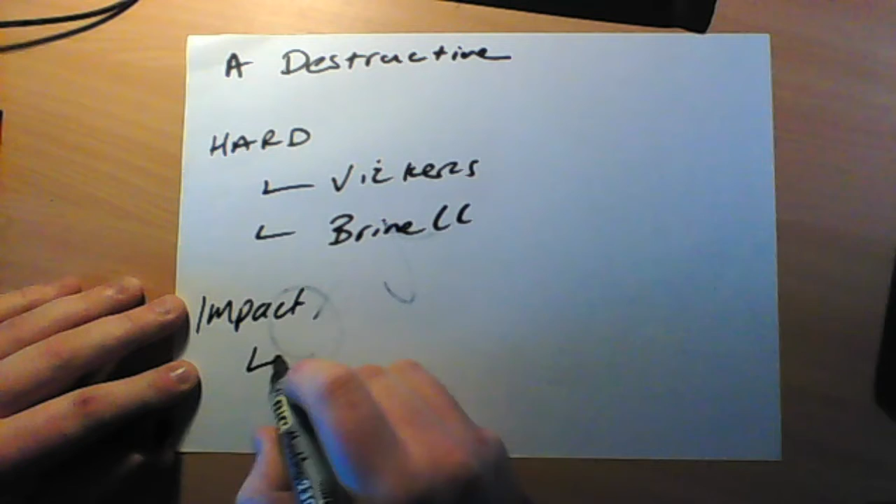So part A is always your destructive testing, okay? So you need to know your two hardness tests, Vickers, I'm going to go through these now in a second, and Brinell. And the other one you have is your impact, which is your Izod and your Charpy. So this is for part A.

Another thing you need to know is the different terms. So again, you have metal fatigue, and metal creep is one. That's where the metal stretches over time. And then you have metal fatigue, which is also over time, but it's to do with an on-off sort of stress.

So metal creep is where you have a soft material like lead or copper under huge continuous stress and it just stretches over time, whereas fatigue is where you have something strong like steel under stress that's on and off, and then eventually it cracks and shatters. Both of them happen over a long period of time. So those are a few key things you need to know. You also need to know advantages and disadvantages for both of these.

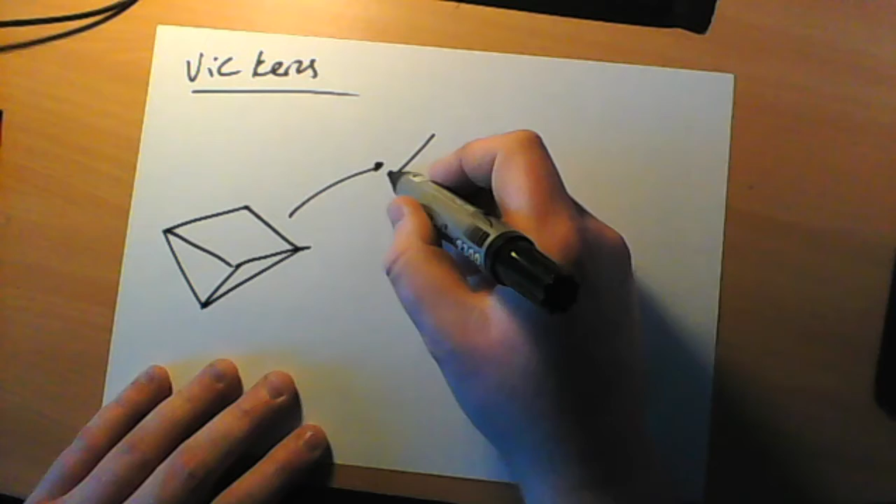Okay, so I'll start off with my Vickers. They could ask you to decide on a test to check the hardness of a material, Vickers or Brinell. So Vickers, like a V, the indenter looks like an upside down pyramid, like that. So you need to talk about what the indent leaves. When it goes into a piece, it leaves a square, like that.

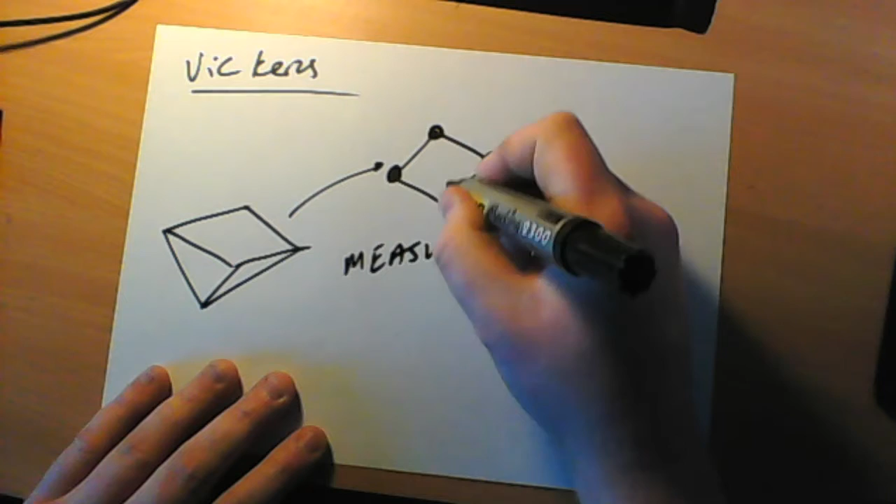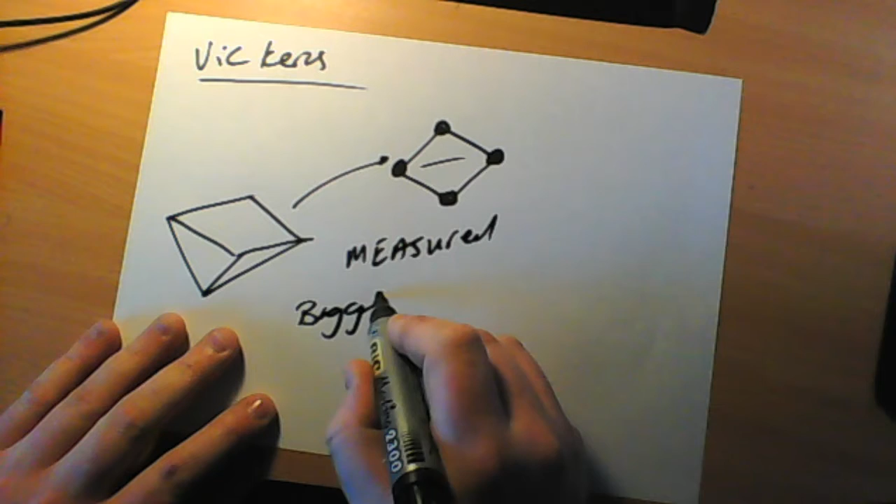How it's measured is you measure the diagonals. So you join the diagonals together and measure the distance, and the bigger this distance is, the softer it is. Same goes for Brinell. The bigger the circle is, the softer the material is.

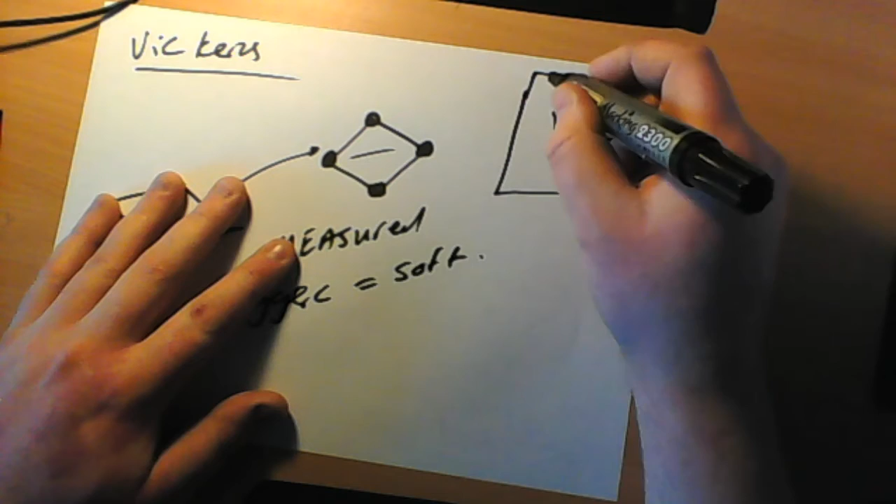Okay, so Vickers, those people that are pushing for A's could be drawing something like this. This is just the machine. Very, very rough, I'd be expecting better drawings than this. And then it looks something like that. That's your Vickers machine. The piece is put in there, this pushes into it, and that tests the hardness.

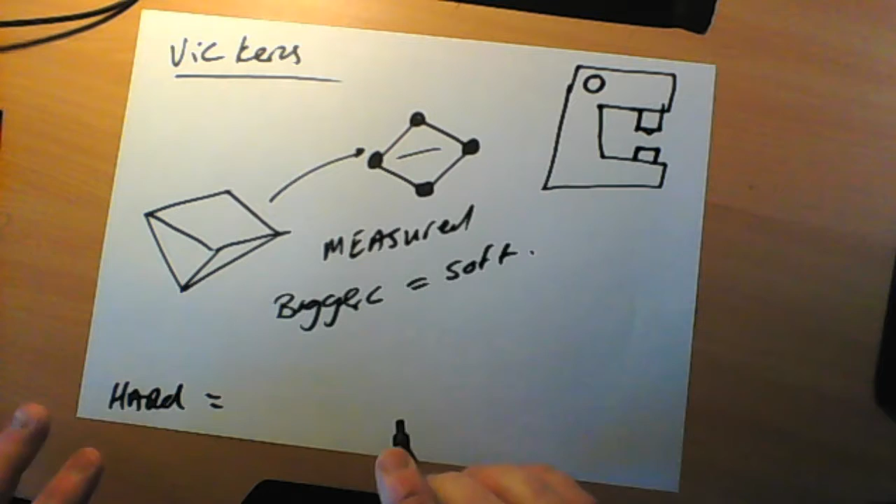So the hardness of a material is how it's able to withstand being dented or indented. So glass and even acrylic are hard materials, brass as well, quite hard materials. So Vickers is quite universal compared to Brinell.

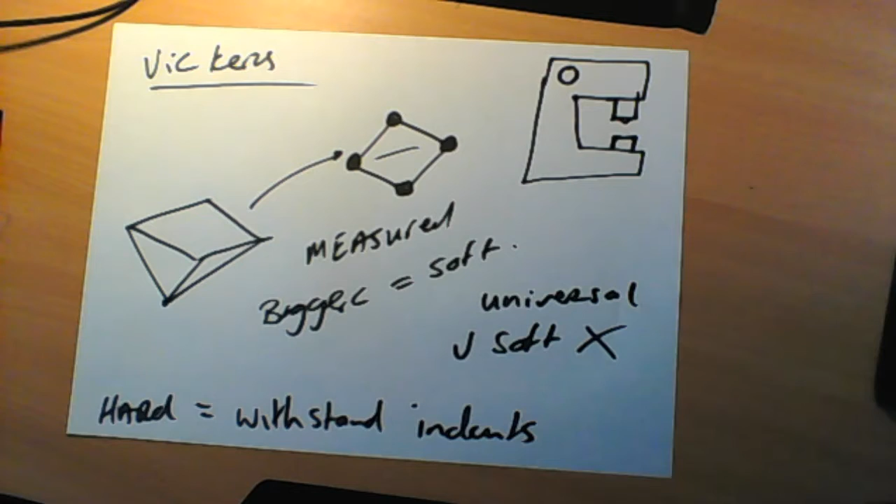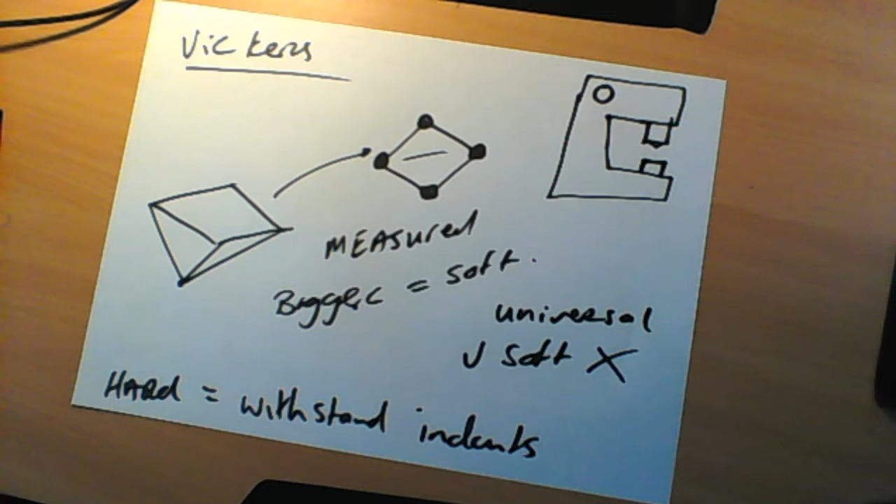Very soft materials are no good, because the indenter will just get lodged in it, because it's actually quite small, like the tip of a thumbtack, it'd be tiny. So if it's very, very soft, it'll go into it and get lodged in it. Is there anything else we need to mention for Vickers? Not really. So you just talk about the shape of it, how it's measured, advantages, disadvantages, and the hardness of the material, that it's able to withstand indents.

Okay, so go for Brinell, B for Brinell, B for ball. Brinell is just a sphere. The ball leaves an indent that looks like a circle, so I'm going to just draw a little circle on this to make it look like a sphere. What they do is you measure the diameter. Again, the bigger this is, the softer it is.

And the bad thing about it is if the metal is too hard, it can distort the ball into like an egg shape. So it can't do materials that are too thin or too soft, because the ball will get lodged in it.

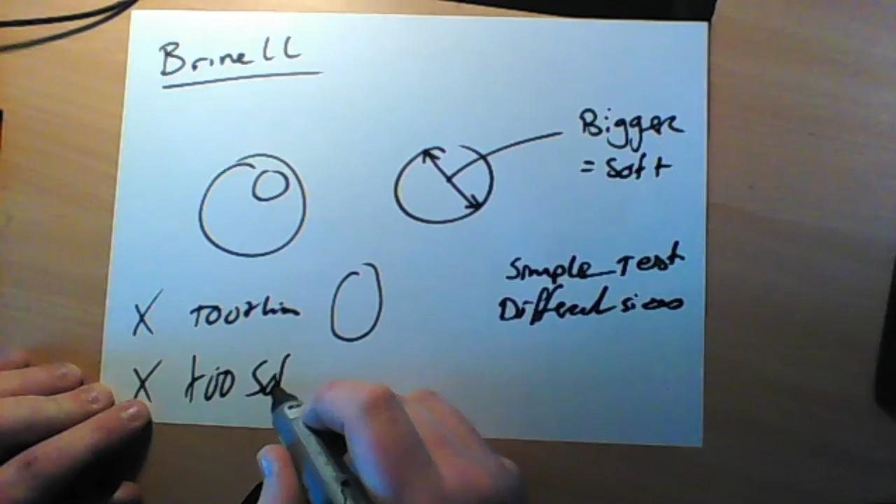Okay, so again, same thing as I drew before. Then I'm just going to draw, and that looks like a sphere like that. This thing comes up, and that is Brinell. So again, you just have your Brinell. So again, a few key things you need to mention: advantages, disadvantages, how it's measured, the shape of the thing, and what it does.

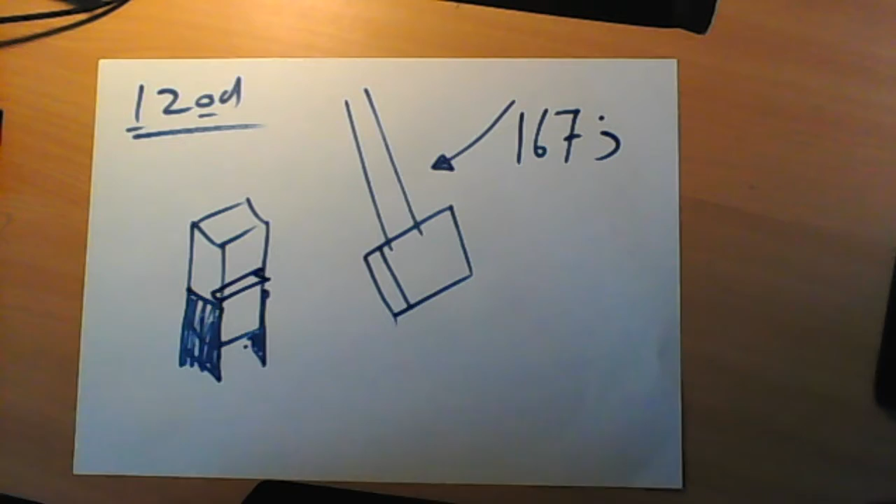So again, it checks to see the indent. It's used to check the hardness of the material, see how far the material can indent. Okay, again, if the material is extremely hard, this thing will also distort. So it's just like if you had a balloon and squashed it, it changes shape. So that's why it's just not as reliable as a Vickers. Okay, so there are your two hardness tests.

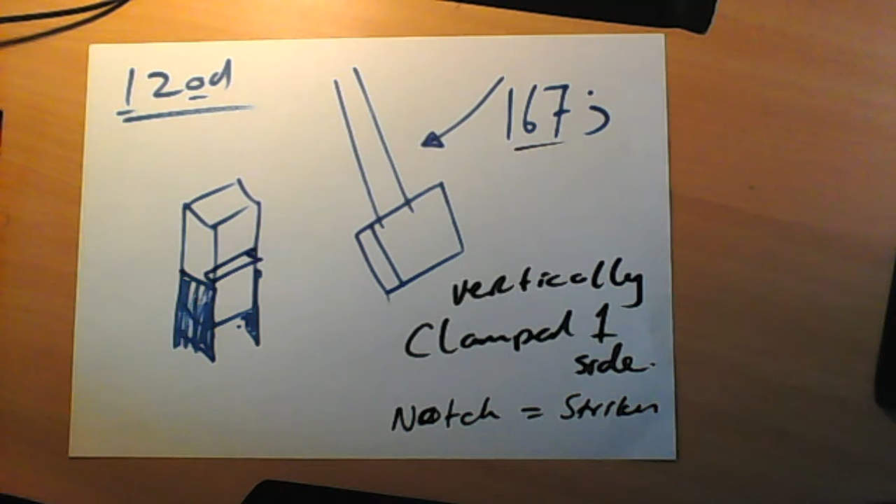The next one you have, okay, I went through Charpy and Izod yesterday, but I'll go through them again really quickly. Izod, so straight away, I know the piece is standing up. Not going to put a notch in it yet. Just going to draw it like this. Izod, O for one, so it's clamped on one side. What it means by one side is this side here is clamped, not this side. Okay, so it's clamped on one side.

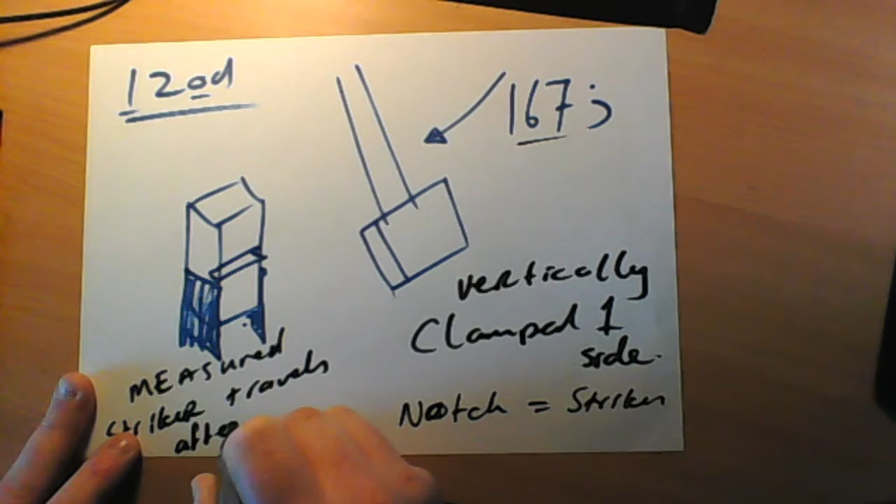Each one of them has a striker, something like this. It's coming down at 167 joules, that's the force that it's coming down at. So we need to think about where the notch belongs. If we put the notch this side, it's going to do very, very little. If you put the notch this side, it'll help it along. It'll help it break. We want it to break at a certain point. So again, that's your 167 joules.

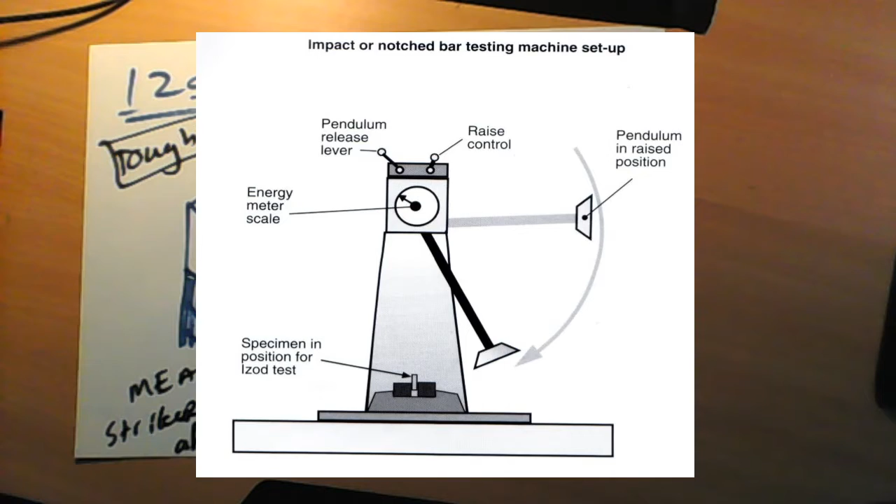Key things, a few things we've shown visually, but you should just jot them down. So it's held vertically, clamped to one side, notch, O for notch, facing the striker. And I've mentioned 167 joules there. Okay, those people pushing for full marks, you'll actually draw the machine.

I actually have the machine here, one sec. So you will draw something that looks like that. That's your striker there. The striker, that's for both the Izod and the Charpy. I don't know if you can see the mouse there. You can see the pendulum's held up. The higher it's held up, the more joules you get, the more energy you get by the time it strikes it.

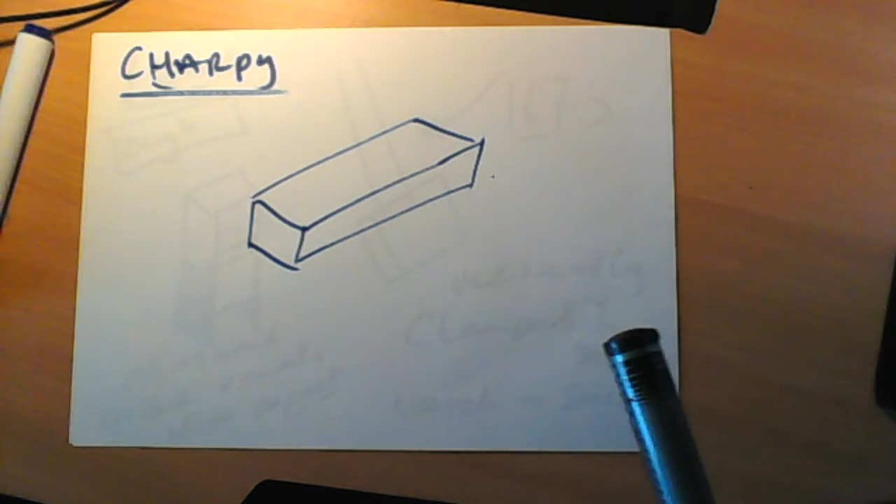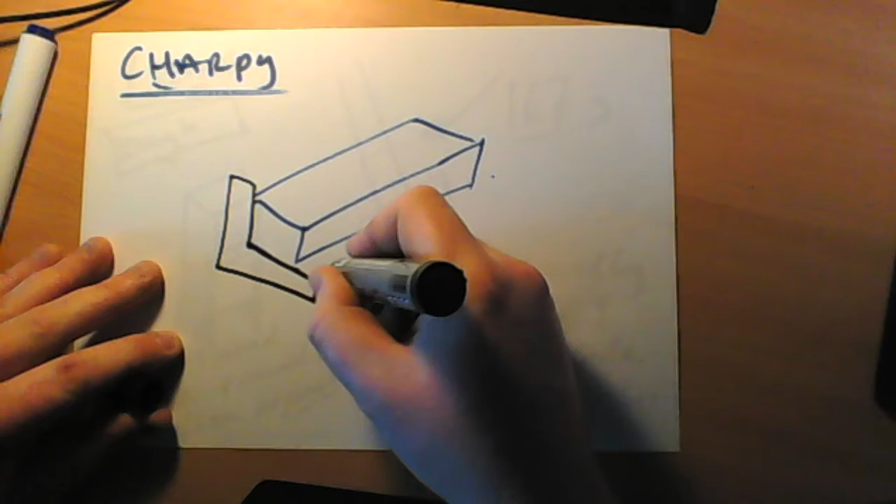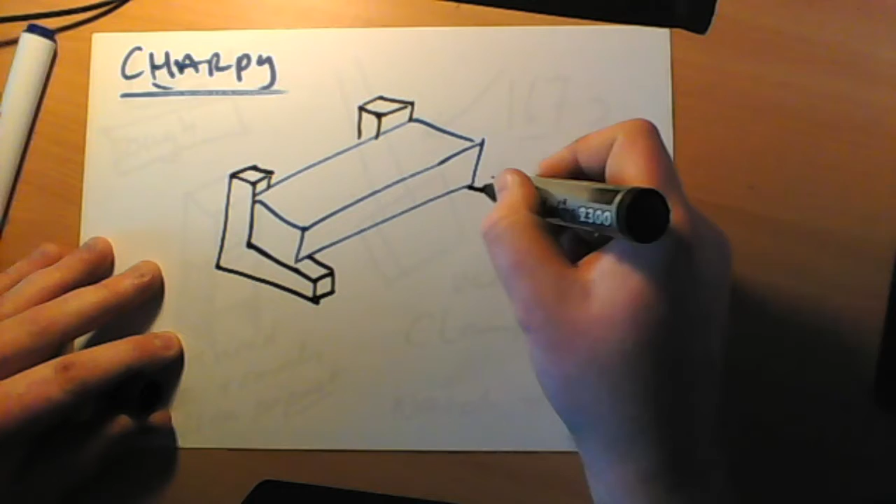How is it measured? Let me get rid of this, one sec. So it's measured by how far the striker travels after impact. So again, this is a toughness test. Toughness is the material's ability to withstand sudden impact. The likes of crash barriers, anything like the chassis of cars, these will have to be impact tested. Okay, so that's Izod.

So again, held vertically, clamped on one side, notch facing the striker. It's measured by how far the striker travels after impact. And then if you're pushing for full marks in this question, you want to be drawing something like that. We spoke a little about that last week.

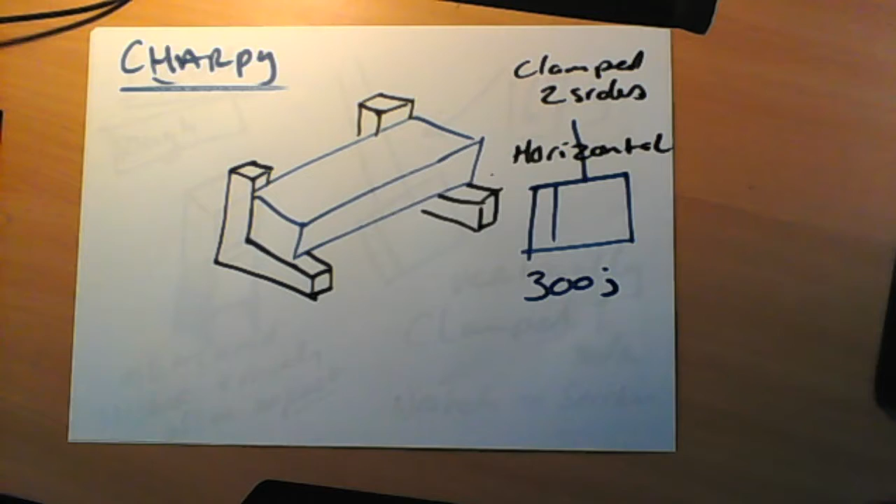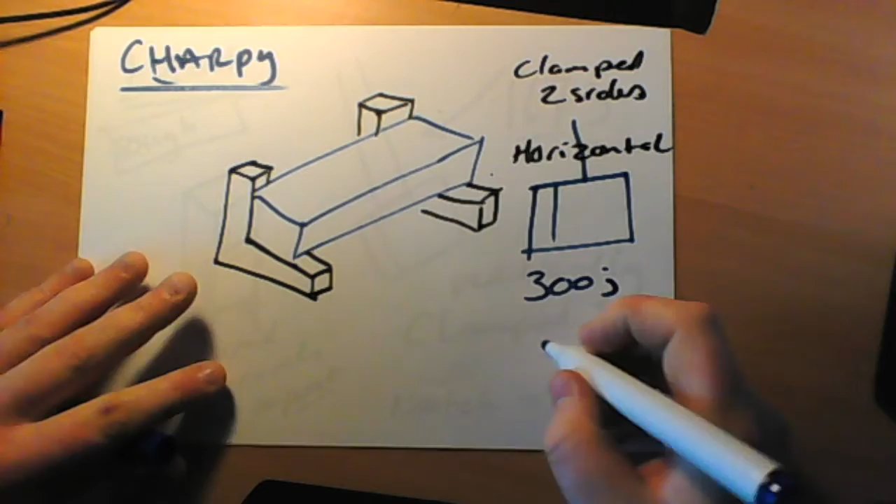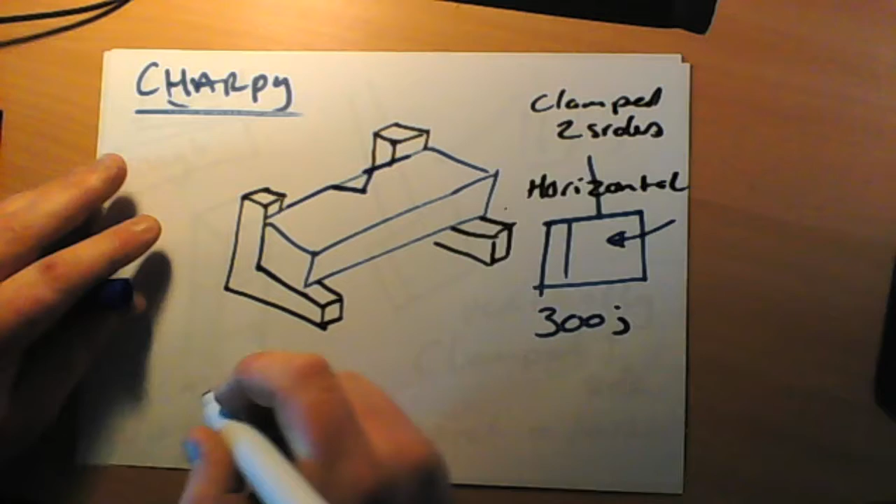Okay. The next one is Charpy. So CH, H for horizontal. So the piece looks something like this. I'm not even going to draw the notch yet. There we go, the piece is held horizontal. So Charpy, think about it, if it's held horizontal, if I was holding this out like this, clamped to one side, and I hit it, it's just going to move. So it needs to be clamped on two sides. It's not really clamped, it just sits on a ledge really.

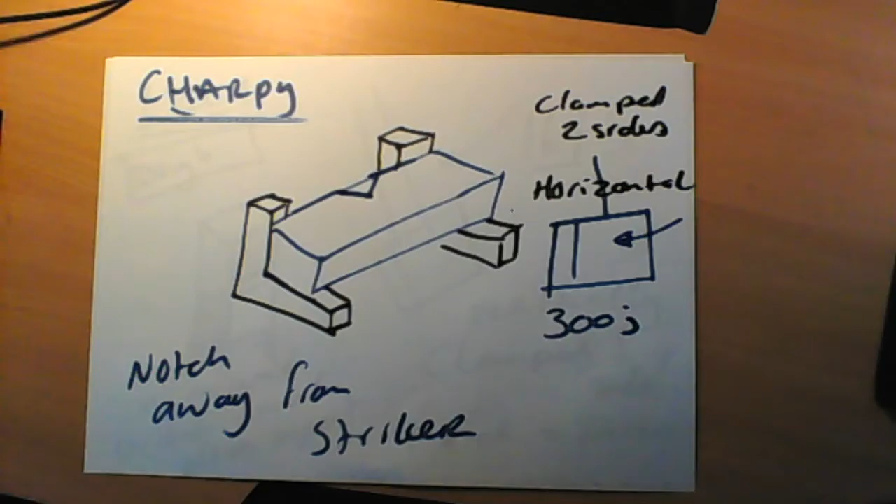Oh, such a bad drawing. It's not too bad.

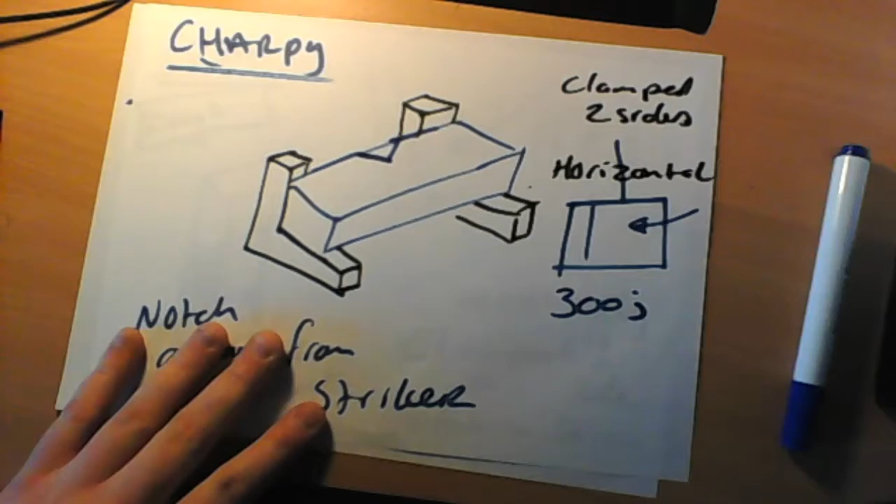There we go, so clamped on two sides, held horizontal. Again, we need to think about the striker. Oh, sugar, didn't leave much space for the striker. The striker's coming down like this, we'll say. It's coming down at 300 joules, so more than Izod. There's more energy coming down, because it's coming from a higher angle, so instead of coming down from a lower angle, it has more energy by the time it contacts it.

Okay, so same thing, as we said here, it's measured by how far the striker travels after impact. So the striker's coming down here like this. The notch in this instance is away from the striker.

Notch away from the striker, it's held horizontal, clamped to two sides, and then the joules. Joules is probably the most important thing, a lot of things that people continuously leave out. Is there anything else I need to mention there? No, same again, it's a toughness test. Now there are your 4 toughness tests that can come up.

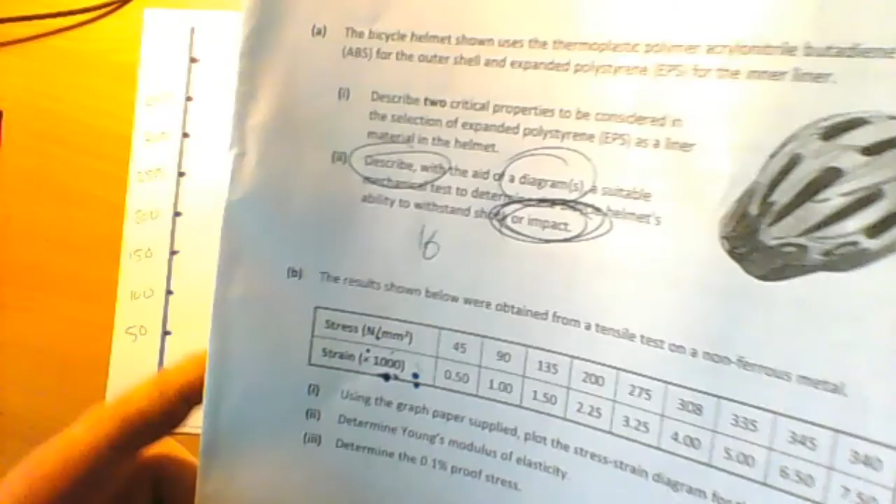The next thing I want to look at is a graph. Okay, so I might just look at the graph from the mock. Where's the mock? Oh, so there's the graph from the mock. So again, it's a stress strain graph. You can see the top, it says 45, 90, the whole way up to 340. So I know on the left has to go up to 340, and then on the bottom needs to go up to 8, we'll say. Okay, so I'll leave this here somewhere that I can read it.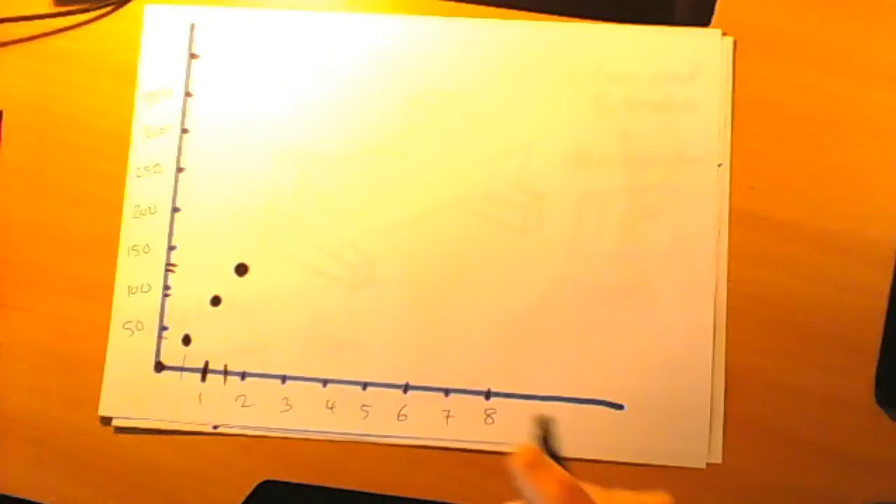Vital that these are all equal, or else you're going to end up with a not so great graph. Okay, so the graph's like that. So again, I said I need to go up in 50s here. So 50, 100, 150, 200, 250, 300, 350. And I have 1 extra to spare. Then along here, 1, 2, 3, 4, 5, 6, 7, 8. Where I got those numbers from, again, as I said before, the top always goes up to the left.

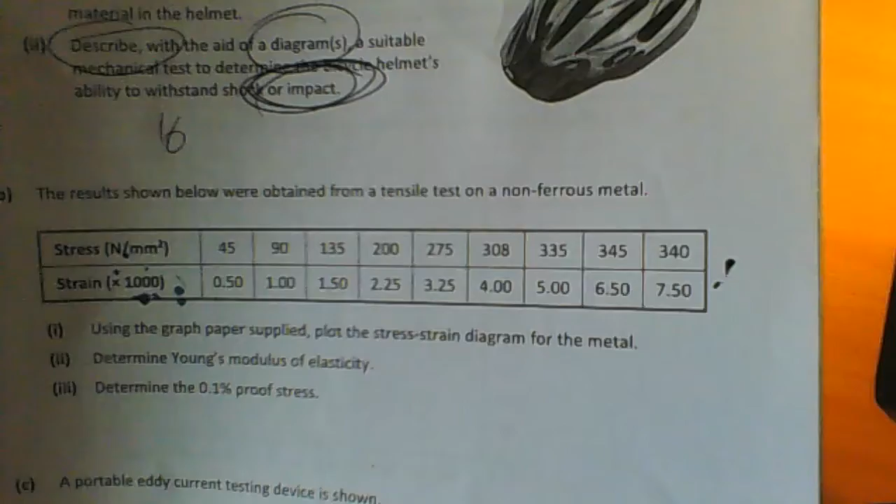So what you have there then, guys, the first point we're going to look at is 45, 0.5. So it's 45 up to 45, which will be somewhere there, just below 50. 0.5 halfway, there's my first point there. I'm going to do this in marker so it's easier to see. Okay, so that's where my numbers came from. I went up to 350 here, because it goes to 340 there, and again the top goes up to the left. And 7.5, there's no point going up in 0.5s or anything like that, go up in 1s, makes it handier for you.

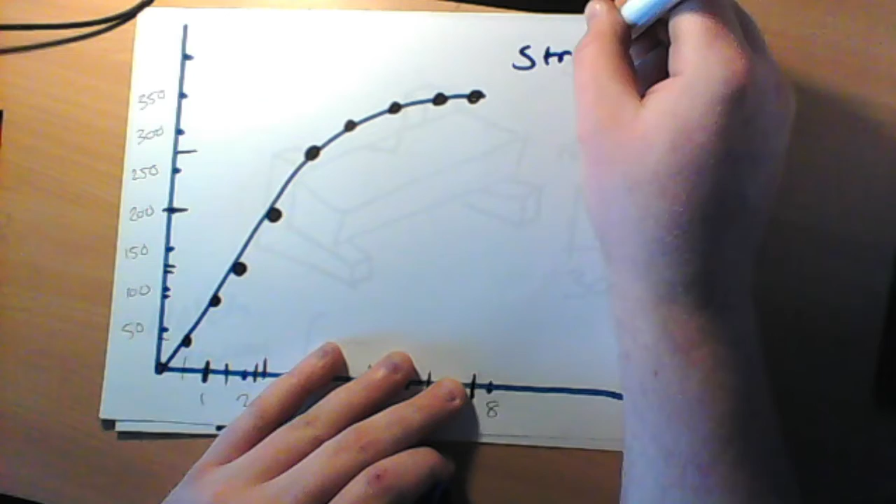The next one is 90, so I'm going to go up to 90, so 90 somewhere there. Again, in the exam you wouldn't want to be drawing big dots here like this, because it's a sign of inaccuracy. Next one, 135, 1.5, so 135, we'll say there's 125 halfway, 135 somewhere there. So far we're going up in a straight line, which is good. 200, 2.25, so 200 is easy enough. 2.25, so that'll be 2.5 there. Half that again.

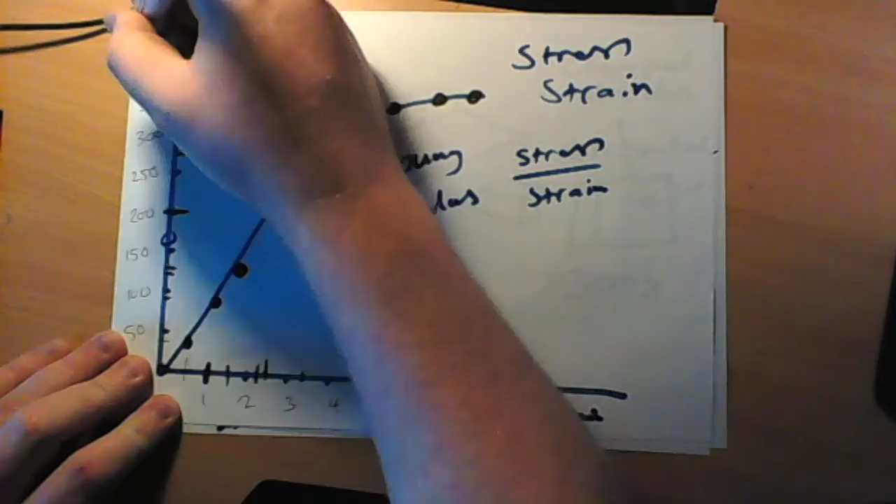Okay, so the 2.25, draw a dot, like that. 275, 3.25. I'm just going to keep going. So there's 2.75, 3.25. So there's 3.25 there. 4 up to 308. So just above 300. Should start to curve off now. So you have your straight line, and then it should start to curve off.

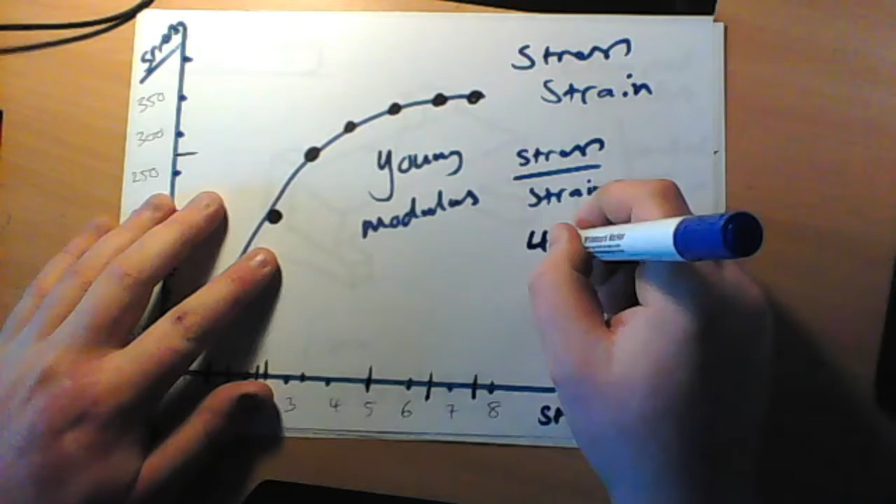5 goes up to 335, so we can sort of halfway. Yeah, it's trying to curve off now. 6.5 up to 345, yeah. And then 7.5 up to 340, so again, just there. That's it now. I've probably gone a bit above, but it's alright. I don't have graph paper to help me. And then all you have to do is just join the nice smooth curve. Try and do it as smooth as you can. And there we go. That's what you call a stress strain graph, okay?

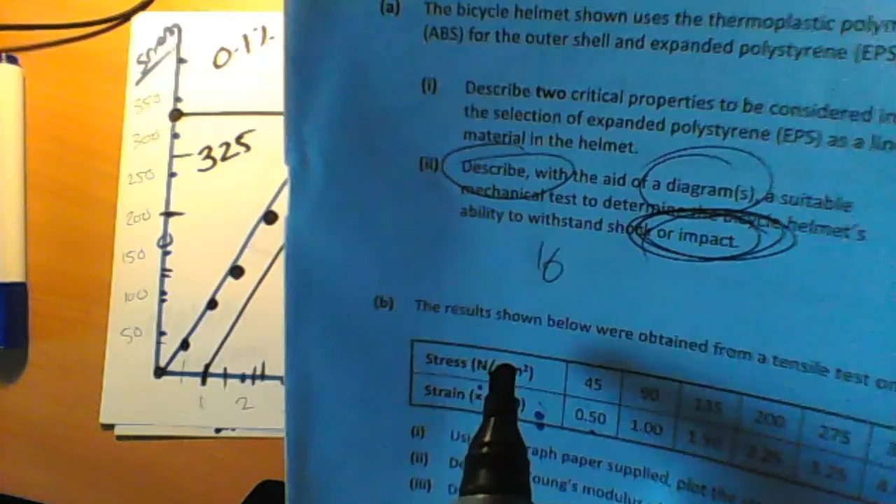Stress strain graph, bit different to a load extension graph. Now the two things it's asking us is we need to calculate the Young's modulus. Okay, so the Young's modulus is stress over strain. So you could just go to the graph, so go to 2, up, hit here, go across and take the figure here.

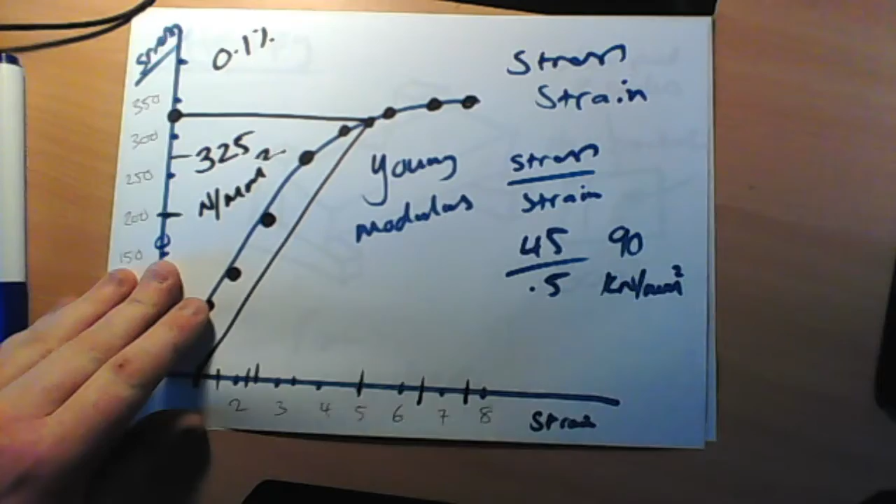This side down here is strain. This is stress. Stress is to do with the amount of pressure it's under. Strain is the amount it extends. So I'm just going to take stress from here. So it's 45 over 0.5. I remember from yesterday that's 90, and the units is kilonewtons per millimeter squared, I believe.

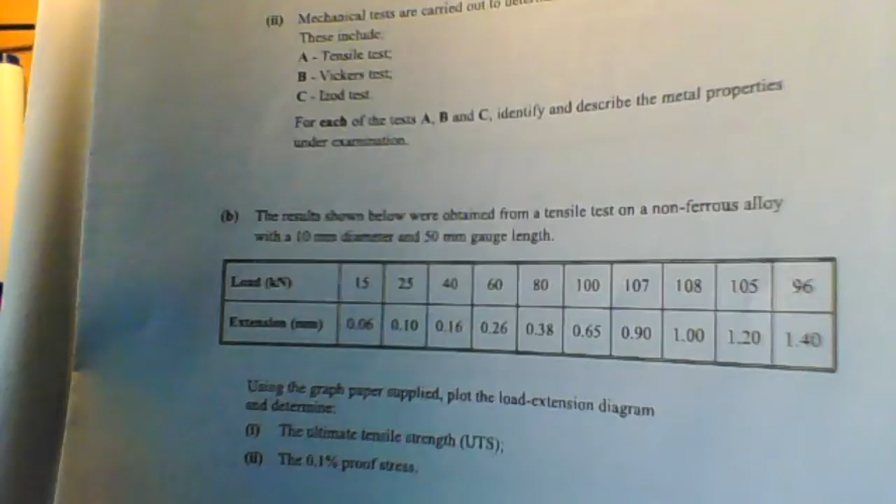Okay. The next thing then you have is determine 0.1% proof stress. So that's why the pick is 0.1%. They want to see at what stress level. So again, this shows our extension. We're just going to come over to 1, up to here, hit here, and then that will show us where this thing starts to distort. So where it starts to be permanently damaged.

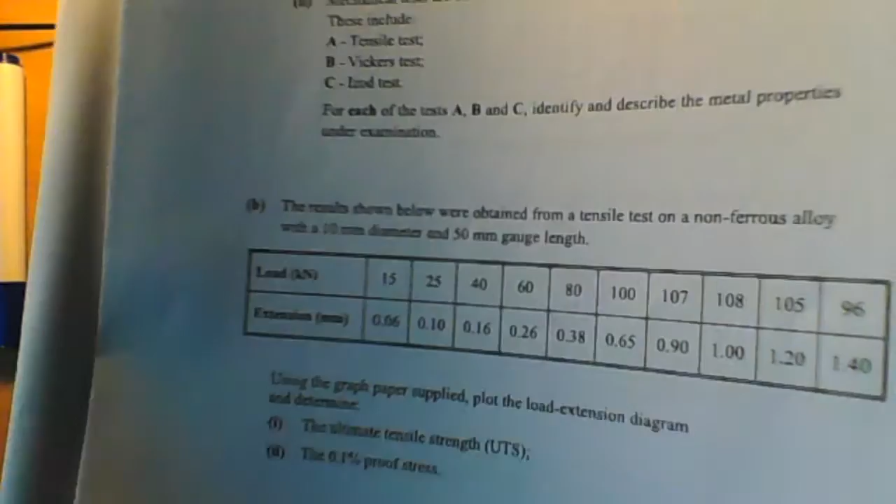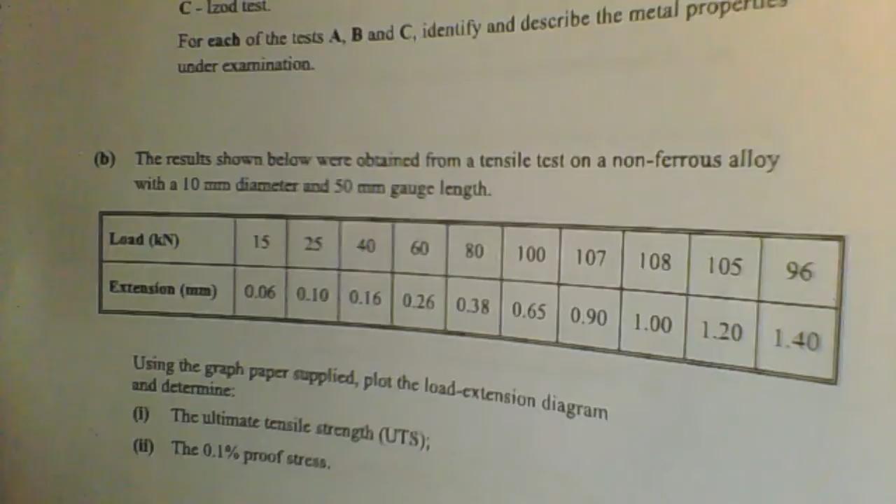So we go to 1, you go parallel to the graph, hit the graph, go straight across. And you can see there, I'm not too far off. That should be roughly 325. And then you're wondering, where do I get my units? There's my unit right there, because that's where stress is measured. So it's 325 newtons per millimeter squared. Okay, and that is that question done.

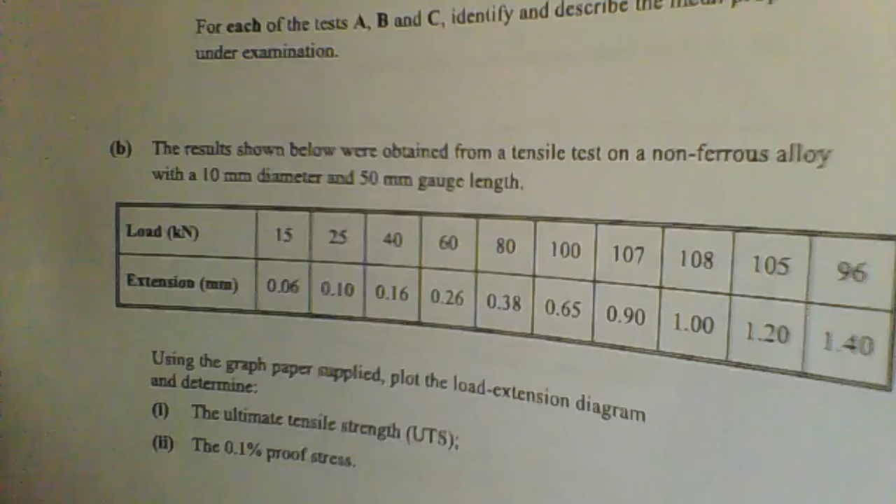Okay, so they've given us, straight away, a few dimensions. The diameter is this, the gauge length is this. You're going to have to use them. Simple as. Okay, so load extension, and they're looking for the ultimate tensile strength, and they're looking for 0.1% proof stress. This is a bit trickier. Stress strain was nice and handy. Load extension, bit trickier, not too bad though.

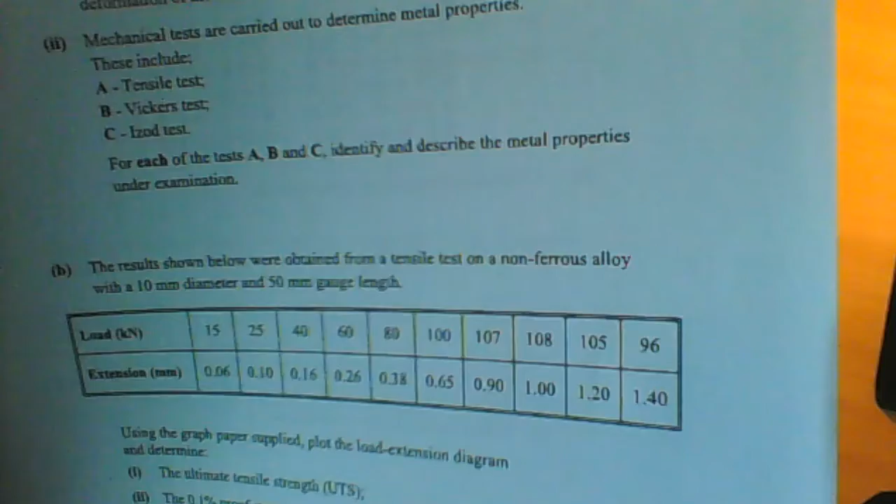So we can see there that the top goes up to 108, and the bottom goes to 1.4. So the amount of load needed is actually very small, and the amount of extension is very small. So this is quite a brittle, yet a weak material. It says non-ferrous alloy, so I'd say probably something like magnesium, quite a brittle material, but not that strong. Again, it's very strong when it's mixed with aluminium though. Okay, so we'll do this one and that'll finish up this video.

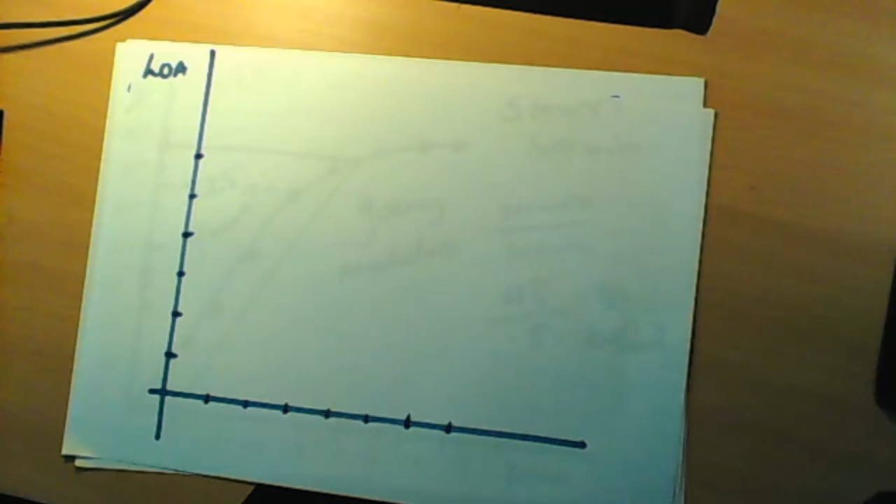Okay, so this is our load extension. Well, actually, I'm about to draw the graph first. I could be left high and dry and not enough space to do it, so we're going to draw this. Obviously, we're doing this on graph paper in the exam, make it handier for yourself. Okay, so something like that. I said it goes up to 107, so we'll go up to 120, we'll go up in 20s.

So 6 notches. Along the bottom goes up to 1.4. I'll go up in 0.2s. Okay, so I need 6 notches along the left, and then 7 along the bottom. 1, 2, 3, 4, 5, 6, perfect. And then 7 along here.

Again, very important that all these are equal distance. Again, for this question, don't go doing first notch is 15, second notch is 25, third notch is 40. Don't, because it's just not going to work. So just look at the highest number, and that's where you start off. What I said was going up in 20s: 20, 40, 60, 80, 100, 120.

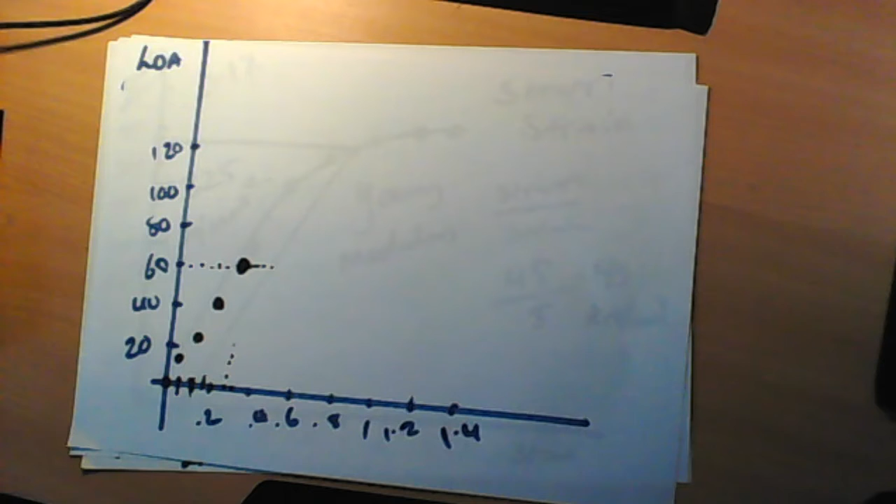That does as well. And then along the bottom, I said I was going to go up in 0.2: 0.2, 0.4, 0.6, 0.8, 1.2, 1.4. So again, I know my last one is going to finish there. Okay, so the first one is quite tricky. 15, 0.06. So there's 0.1, so 0.06 is somewhere there. 15, 0.06 somewhere there. Again, with graph paper, you're able to get this much more accurate.

Then 0.1, which would be there, and it goes as far as 25. So 25 somewhere there. Then I go 0.16, which is somewhere there, and that goes up to 40. Okay, that's nice and handy. It's on a whole number. So again, don't be using big blotches when it comes to things.

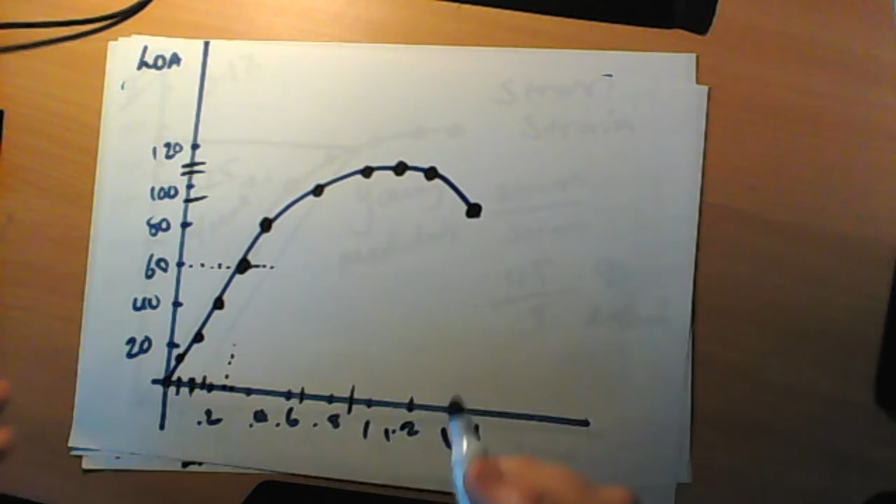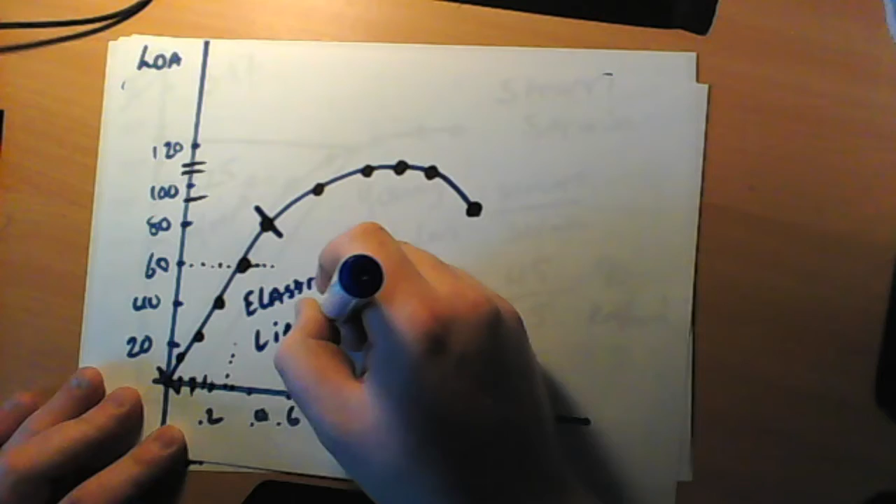So again, how I'm doing this, the next one is on 60, 0.26. So what I do is, 60 is on top, so I go up to 60, go over to 0.26. So up to 60, over to, there's 0.3, there's 0.26, somewhere there. And I go up, I'm leaving another mark. So again, both graphs, you should have a bit of a straight line for a bit, and then it should sort of ease off. 80, 0.38, so that's just below 0.4.

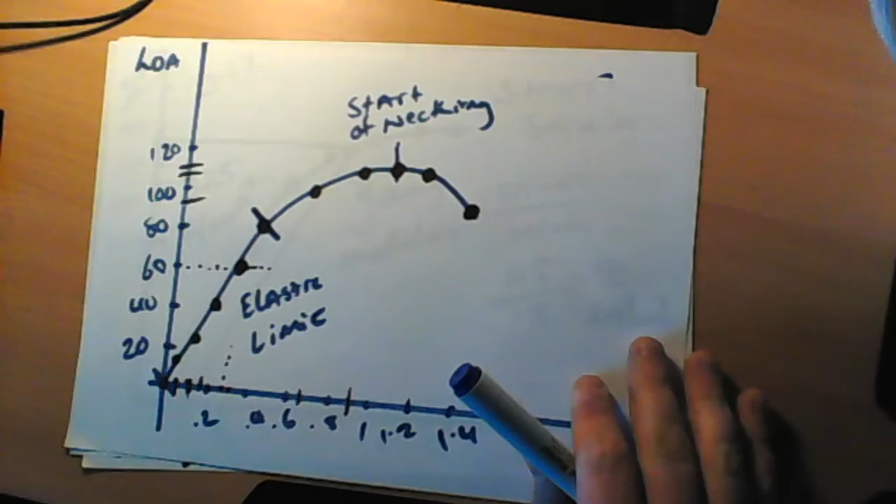80, and then 100, 0.65, 0.65 is there, 100, 0.65, now it should start to ease off. 107 is somewhere, there's 110, so 107 somewhere there. 107 is 0.9, so 0.9 is there halfway. Then up to 0.8, so it's basically on the same level. And then 1.2 is just coming down slightly because it's gone to 105, and then we go to 96, which should be somewhere here, and 1.4. There's our graph, in theory.

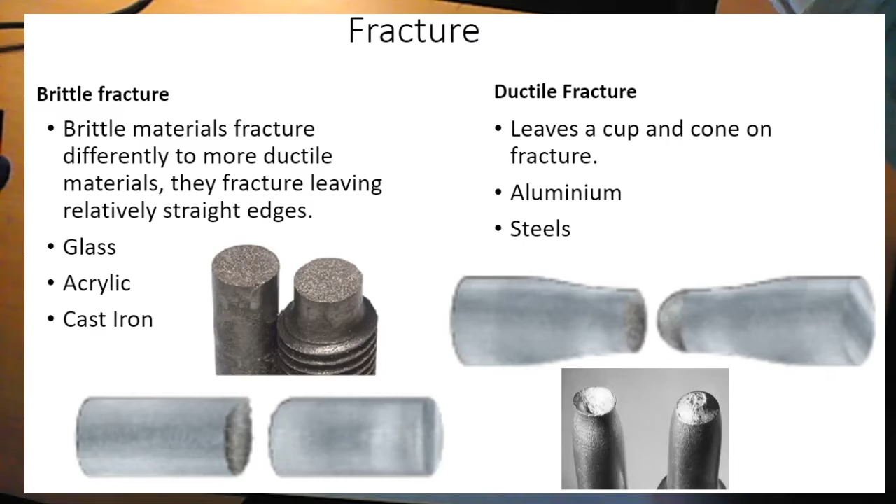So again, you have two different types of breaks. You have a brittle break where it's just a shear break, and then you have a ductile break where it necks, and then you have a cup and cone. So again, in the ductile break, you can see the necking very, very vividly. With brittle fracture, the two of them just shear, very, very little extension on it, it just shatters or just cracks straight down the middle: acrylic, cast iron and glass. And then the other ones leave a cup and cone, so aluminium and steels. Aluminium very much so leaves a cup and cone. It's very, very soft.

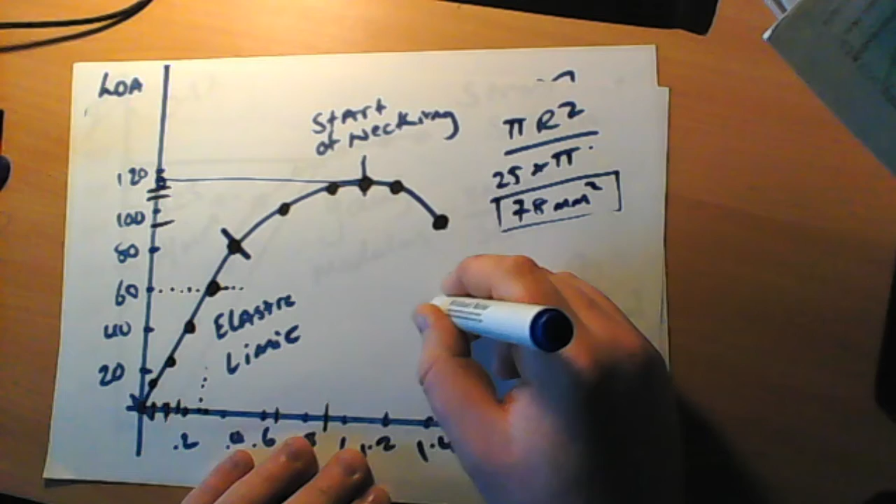That's our graph done. Next thing it's looking for is ultimate tensile strength. Okay, so for the ultimate tensile strength, we have to do a bit of calculating. Not too much though. I have a picture here that talks us through it. So what I need to do is get my peak load, which is at the top. I need to do my cross-sectional area, which is pi r squared, and then I need to put one over the other. So pi r squared, that is your cross-sectional area.

Okay, so I want to find the piece. So again, the tensile piece, if I go back to this, one is over the other. I want to find the diameter of that. I want to find the area of this piece here. Okay? I'll hide that back again. So pi r squared. So again, it says in the diagram, all I need is r. Diameter is 10, so that means that the radius is going to be 5, so r squared, 5 squared is 25, by pi. For the sake of argument, we'll just say 75. It's actually 78 millimeters squared. That's one answer.

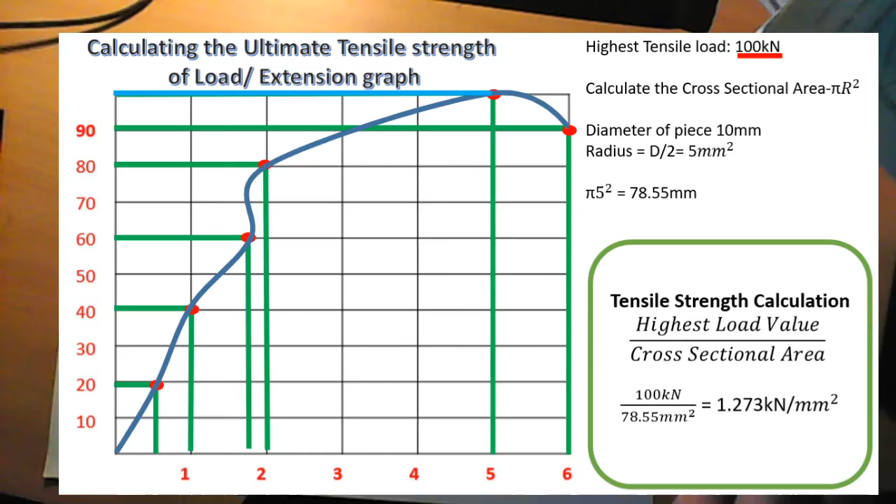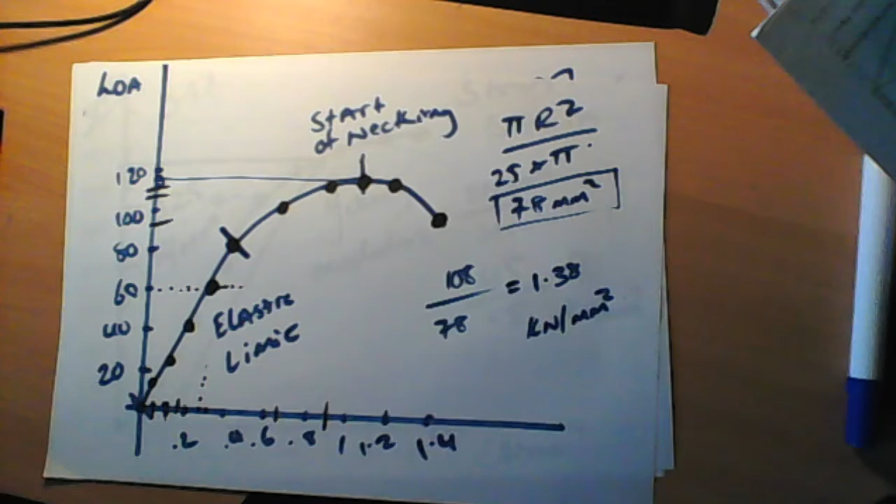Okay, so let's see, was this the right image? No, this is here, isn't it? Okay, so a cross-section area, and then I need to get my highest load value. So what I do is I go to the peak. Again, I can take that from the graph. I can look at the graph and just look for the highest one, which is 108. So I know that it's 108. Or I could just look for the top of the graph, go over here, and that should be 108 over there. Okay, so I put 108 over 78.

Okay, so that's our unit. That's not our proof stress, that's our tensile strength. So again, we need to take the peak, put it over the cross-sectional area, and that's us done. Now, proof stress on the other hand, that's the next question, the last part of this question. Okay, so it's asked us for 0.1% proof stress. 0.1% proof stress, as I said, is the stress that the material needs to take before it starts to bend or distort or stretch.

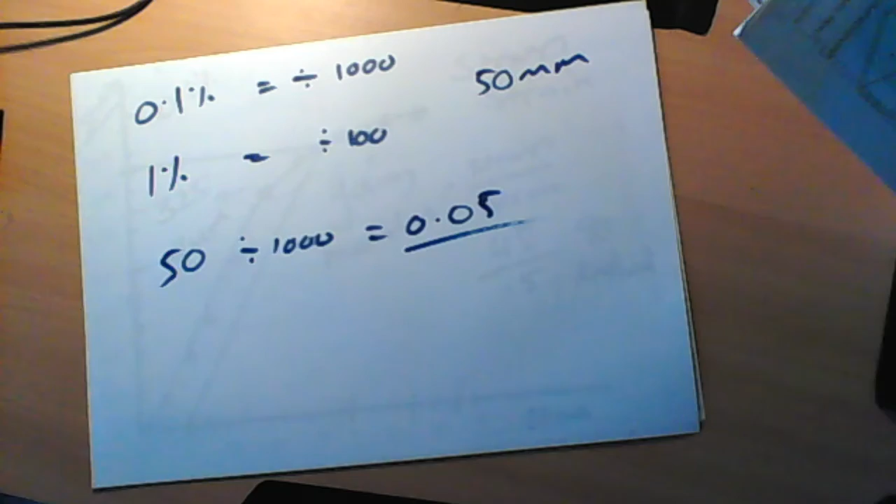Okay, so I have a picture here. Bear with me 1 second. So there's our proof stress. So again, 0.1. We were given a gauge length. Our gauge length is 50 millimeters. So I'm going to do this on a different sheet because I'm running out of space here. Hold on to that though. Where's my sheet?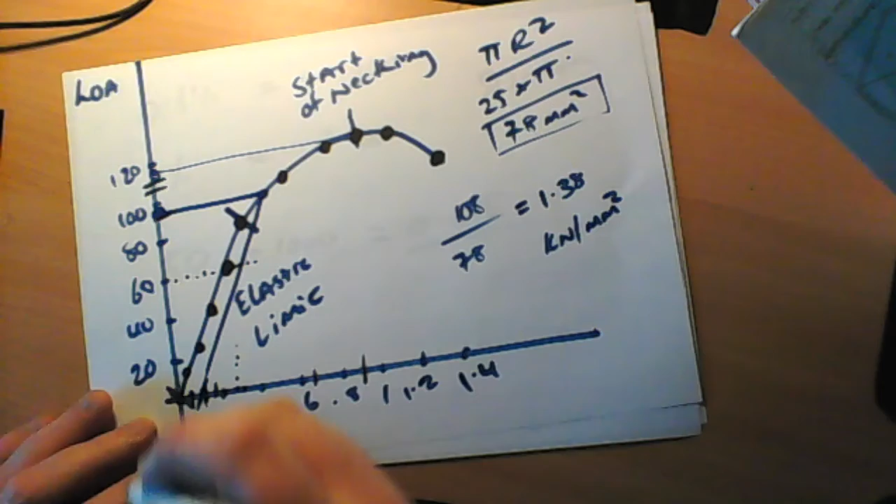So you have to think about it. You want 0.1%. 1% of something is something divided by 100. So it's equal to dividing by 100. 0.1% is also, you put another 0 onto it, so it's dividing by 1000. Okay? So the gauge length I'm looking at is here. I'll put the thing back up in a second. Gauge length is 50 millimeters. And we've already got our cross-sectional area on.

Jeez, will you hide? There we go.

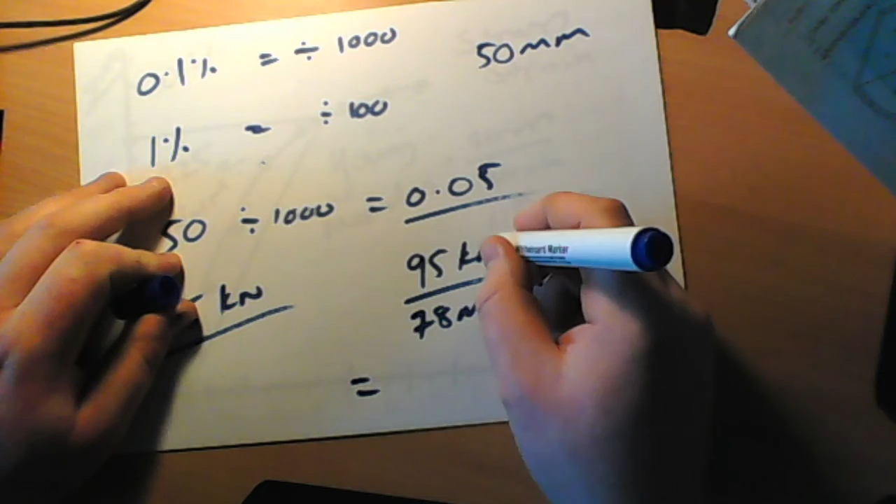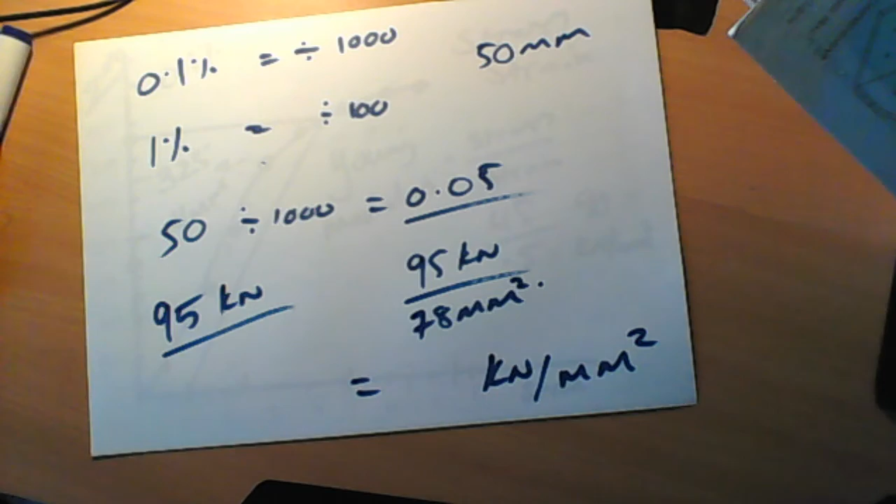0.1% is divided by 1000, 1% is divided by 100. So we need to divide 50 by 1000. It's equal to 0.05. So that's where we go from. You divide by 1000, and that's where you're going to go from in this drawing. So we go from 0.05, which will be somewhere here.

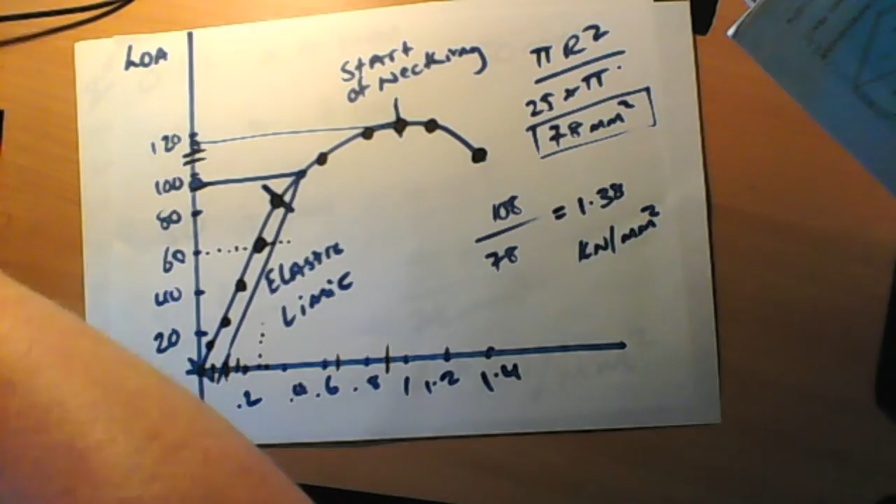Oh my god, what a mess of stuff here. 0.05, parallel up till we hit the curve. Hit it. Straight across. Looks to be about 90, say 95 for the sake of argument. So that's what we call our proof load. So the proof load is 95. And if you're ever stuck with the units, just look back at the thing. You can see the load is measured in kilonewtons. It says it on the drawing.

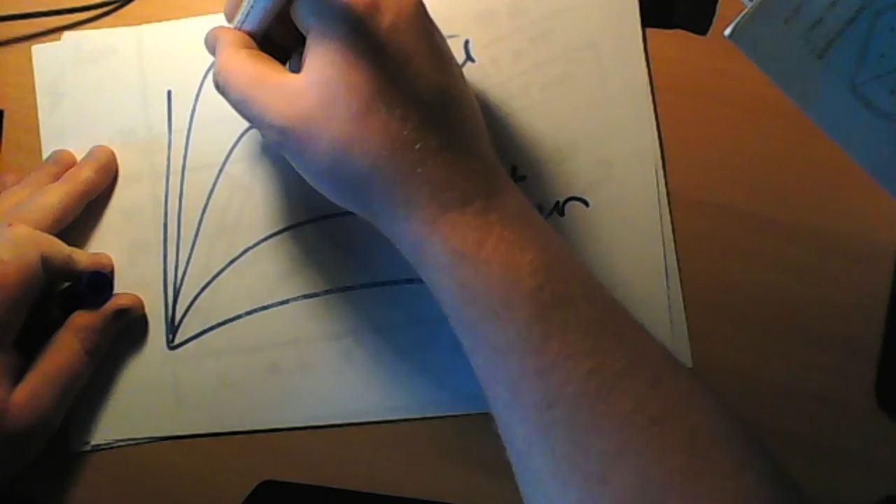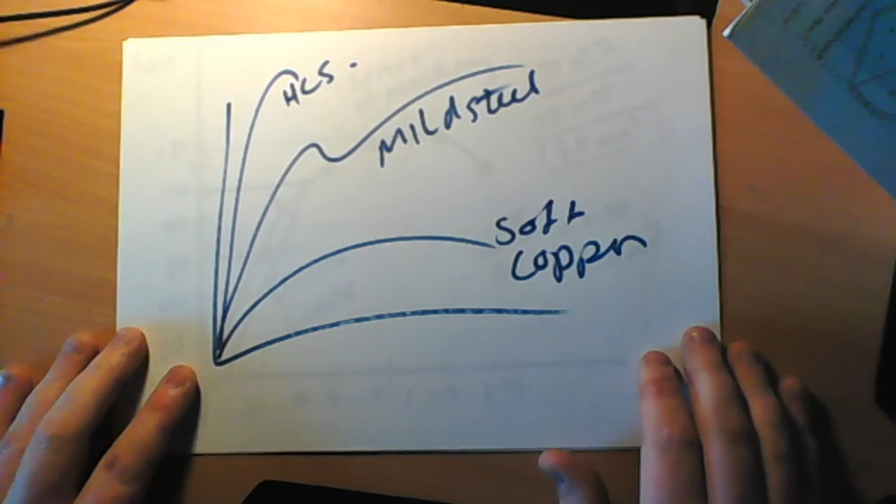So it's kilonewtons. And as you can see from our drawing here, it's proof load over cross-sectional area. So it's proof load, which is 95 kilonewtons, over a cross-sectional area, which is 78 millimeters squared. So I know our answer is going to be in kilonewtons over millimeter squared. Phone out again, have a look, 95 divided by 78.

So 95 divided by 78 gives me 1.217. Again, I might say just bring it to the nearest decimal place. That would be 1.218. Okay, and that is your questions there.

Okay, so I'm just going to go through one last thing that I went through yesterday. What are we at? Oh, geez, nearly half an hour. My God, sick of listening to me.

Again, you have 3 different graphs here. One is like this, one goes up like that, and the other goes up and breaks. This one here is a soft material, not tough, so copper is ideal for that. This one is your mild steel. It's flexible, it's ductile, but it's also very strong. This one here is strong, but it's brittle, so it's something like glass or cast iron or mainly a high carbon steel. So they could ask you to analyze different graphs.

That came up last year. Don't fancy it to come up again, but it's simple. Okay, so that's part A and part B of question 2, just things that you need to look out for.